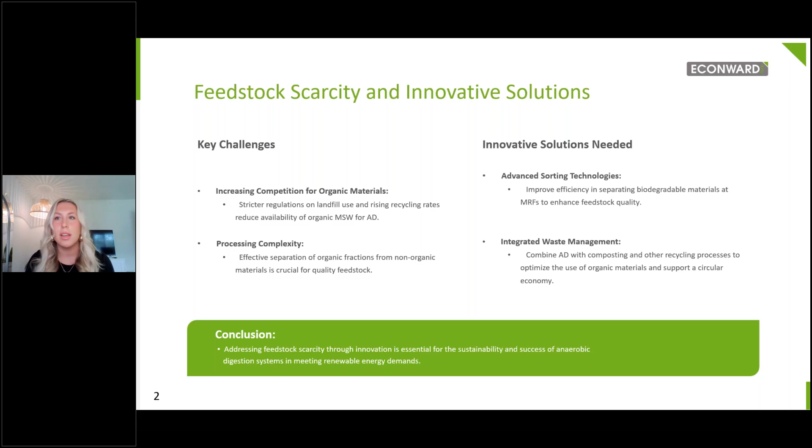Good afternoon, everyone. Today we'd like to discuss a pressing issue in the field of renewable energy, specifically relating to the scarcity of feedstocks in anaerobic digestion. We're particularly focusing on municipal solid waste, or MSW for short, throughout this webinar. As we continue to seek sustainable solutions to our energy needs, understanding this challenge is crucial. And just as a little disclaimer, this presentation is not geared towards agricultural feedstocks, but rather to new feedstocks outside that agricultural sector.

Here we will discuss a few of the key challenges and innovative solutions needed. One of the primary challenges we face is the increasing competition for organic materials for anaerobic digestion, which is resulting in lower prices per ton. Our good feedstocks, such as pure pre-consumer food waste or source-separated organics with low levels of contamination, are becoming less and less available due to the increase in competition.

The tipping fees paid by the seller of clean organic feedstocks for anaerobic digestion will continue to decrease due to the increasing demand from biogas developers seeking long-term contracts. So these plummeting tipping fees make biogas projects harder and harder to cash flow.

Additionally, the complexity of processing MSW poses yet another hurdle. Effective separation of the organic fraction from the non-organic material is absolutely crucial for ensuring that the feedstock quality remains high. Without adequate sorting, the operational efficiency of the anaerobic digestion system can suffer, ultimately reducing biogas yield and undermining the potential benefits of anaerobic digestion.

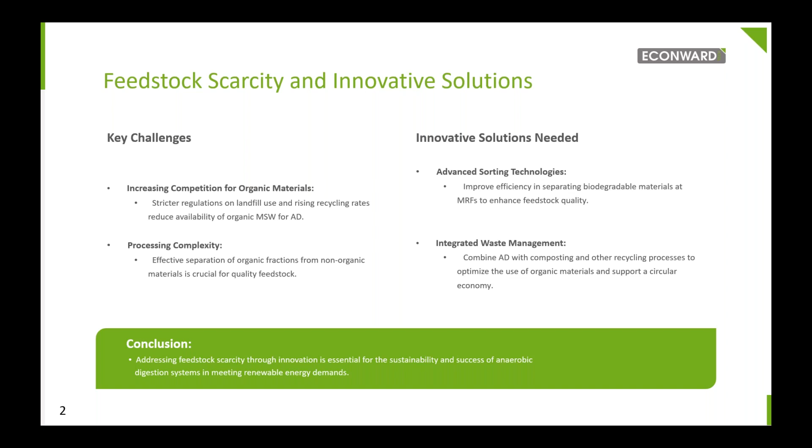Food waste is a smaller contributor at this time, but it's highly valued due to the high organic content, which will then generate more biogas per unit volume. However, these resources are really limited. They're super geographically dispersed, and they're often hard to collect or pre-treat, all of which contribute to a constrained feedstock supply chain.

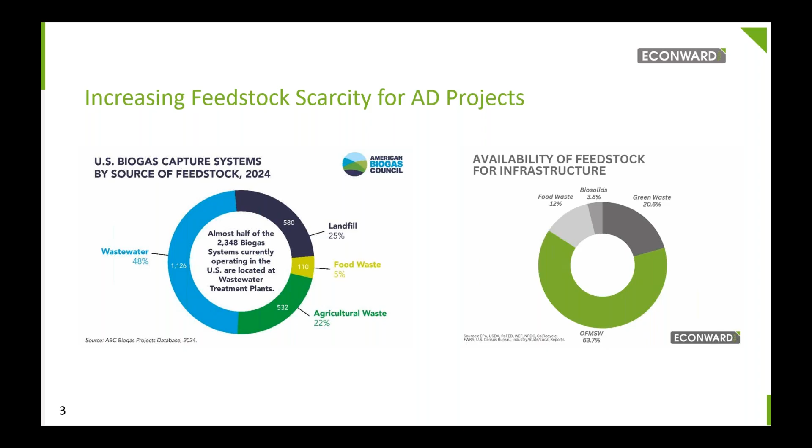The organic fraction of municipal solid waste, or OF-MSW, is considered one of the largest untapped feedstocks for anaerobic digestion. The US generates approximately 63 million tons of food waste annually, much of which ends up in landfills. Diverting it to anaerobic digestion plants could dramatically increase biogas production while reducing greenhouse gas emissions. A large share of this waste is not yet being captured, presenting a massive opportunity.

Globally, about 1.3 billion tons of food is wasted every year, with a significant amount being organic waste that's either disposed of in landfills or left unmanaged. If even a fraction of that waste could be used in anaerobic digestion plants, it would provide a sustainable, renewable source of energy. Europe has been leading efforts in integrating OF-MSW into energy generation, but the US and other regions have lagged.

Our cities and states are increasingly adopting zero waste initiatives and landfill diversion mandates, especially for organic materials. For instance, California's SB 1383 requires a 75% reduction in organic waste by 2025, creating a larger incentive to use OF-MSW in anaerobic digestion plants. Yet many jurisdictions have not fully implemented systems to divert this feedstock, leaving it underutilized.

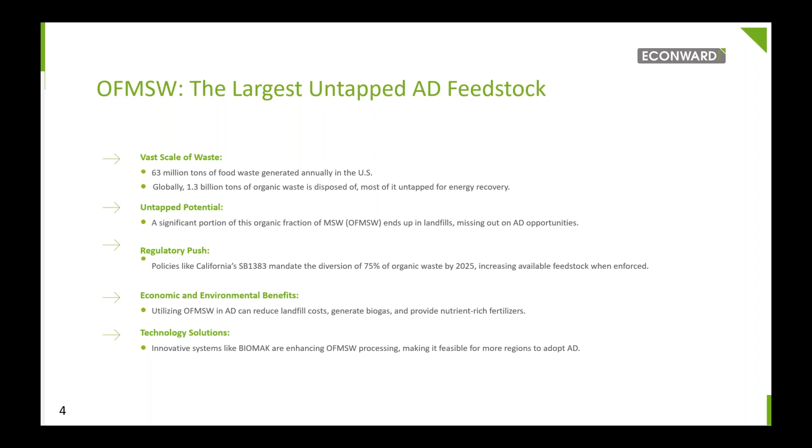These examples demonstrate that while OF-MSW is abundantly available, it remains underutilized in many regions, offering a significant opportunity for expansion of anaerobic digestion capacity globally.

As we face increasing scarcity of high quality, clean organic waste for anaerobic digestion, technologies like BIOMAK offer innovative ways to transform a broader range of waste materials into viable feedstocks, increasing biogas production potential and improving efficiency. The BIOMAK system uses a process known as thermal hydrolysis, which acts like a pressure cooker in our kitchen. It applies temperature and pressure using saturated steam to break down complex organic materials and waste.

This breakdown results in simpler, smaller molecules such as sugars, fatty acids, and amino acids, as shown in the hydrolysis section of this slide. By converting carbohydrates, fats, and proteins into simpler components, BIOMAK enables a higher biogas yield when the material is fed into the AD system.

One key benefit of BIOMAK is the separation of the hydrolysis stage from the AD process itself. By doing this, BIOMAK helps treat plants and condition the feedstock, making it more readily digestible for microbes in the anaerobic digestion system. This not only increases biomethane potential, but also reduces residence time in the digester, meaning faster, more efficient biogas production. This pre-treatment step is particularly valuable for materials that are typically harder to digest, such as

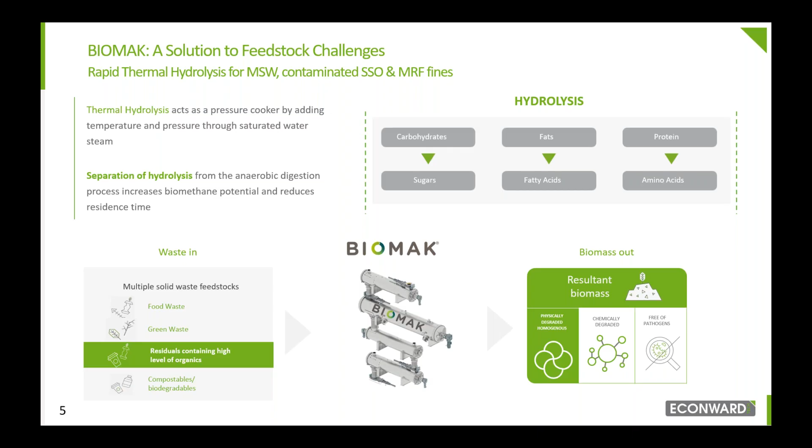Our system consists of 4 autoclaves connected in series by means of hydraulic valves. Inside, the waste is subjected to thermal hydrolysis. The top inlet hopper has a scale for precise weighing of incoming material before it's fed to the first autoclave.

Once the first autoclave or inlet chamber is loaded, the hydraulic valve is closed and saturated steam is injected until the desired pressure and temperature conditions are reached. That pressure can range from about 29 to 58 psi, and the temperature ranges from 248 to 320 degrees Fahrenheit. The main purpose of the valve is really just to balance the system pressure in the most efficient way.

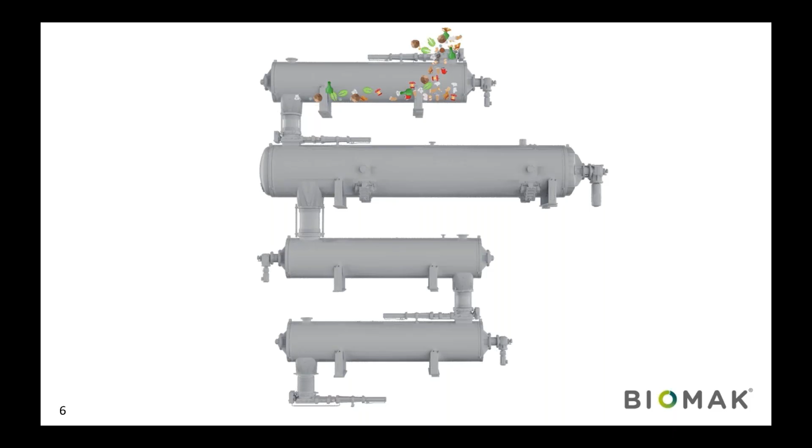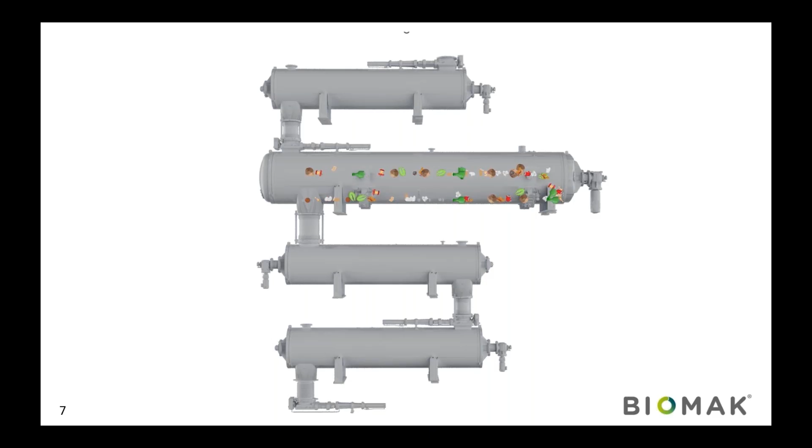After reaching the parameters set by the operator, the inlet valve to the second autoclave is opened, allowing the material access. The second and third autoclave, called the reactor and the transit chamber respectively, rotate the internal material. At this point, a new batch of waste would then enter the inlet chamber, but just for the sake of understanding visuals, this rendering just follows one particular batch of waste.

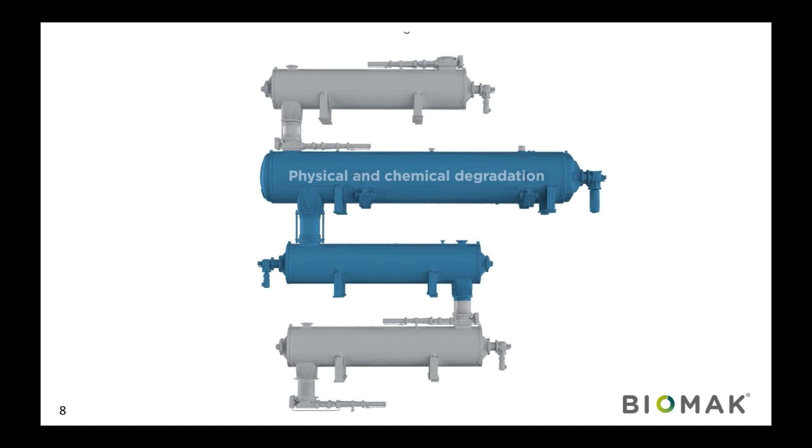Thanks to this movement and the stability of the preset temperature and pressure conditions, we can guarantee an effective and efficient thermal hydrolysis. This process ensures a homogeneous, degraded, and hygienized biomass. These 2 chambers, the reactor and transit chamber shown in blue here, operate continuously and are always conditioned at the same high temperature and pressure conditions, regardless of where the other autoclaves are in the process.

This rendering shows the hydrolyzed material entering the transit chamber, done to ensure full hydrolysis and undergo a longer residence time in these conditions while still being able to maximize the use of the autoclaves at this time.

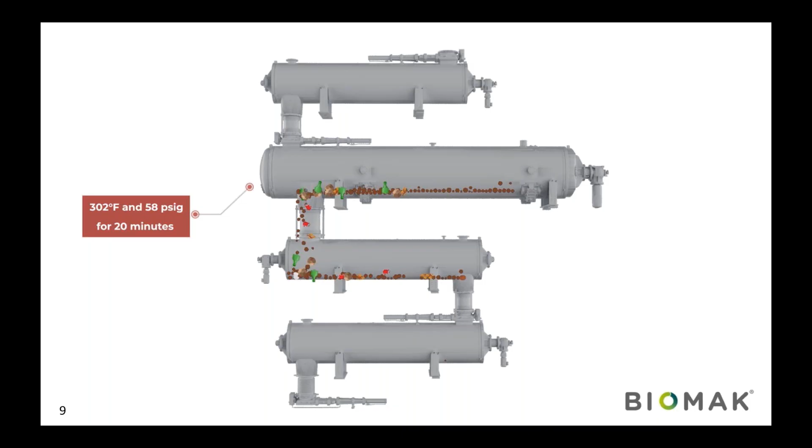Finally, in this 4th autoclave or outlet chamber, the depressurization takes place to unload the material at atmospheric pressure. The system is synchronized to reuse the steam from the depressurization for a new inlet chamber pressurization process. That system is bidirectional, allowing for the balance of pressure in both chambers. In that last chamber, the material is transformed into our biomass, which will be transported to a post-treatment process by way of conveyor belt system and through mechanical separation.

This mechanical separation is done through a vibrating screen where the hydrolyzed organics fall through a 25mm sieve screen, and those non-organics or the overs are carried into a separate collection bin. The time required to obtain the biomass is 40 minutes from the time the waste is placed into the receiving pit, but it undergoes hydrolysis in 20 of those minutes.

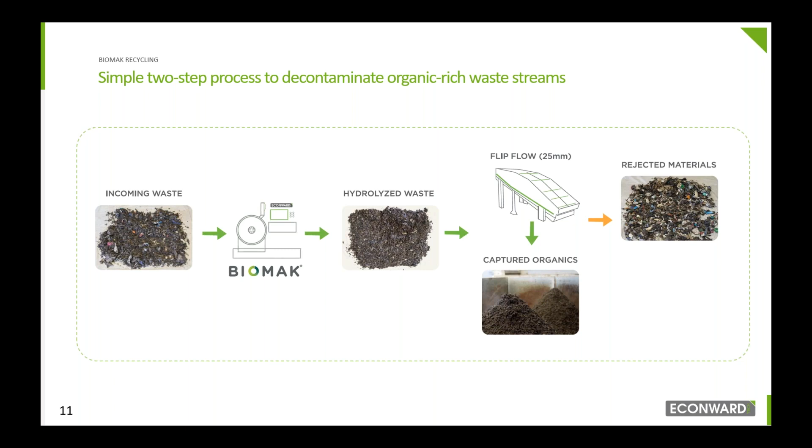Starting from square one, this is what the tipping floor looks like on an average day. Most of this composition is MSW, but you can see some areas where the load is more consistent with materials recycling facility rejects. All of that's totally fine since the material entering the inlet hopper has just the sole criteria of being under 10 inches. Any form of mixed residential waste is completely accepted and is commingled.

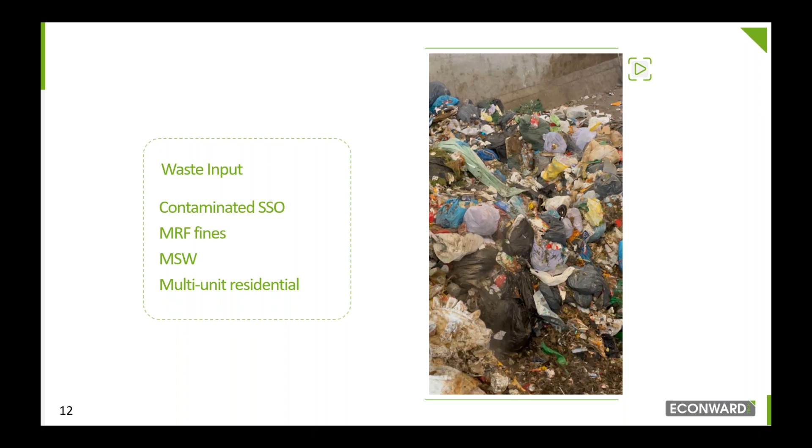This slide shows the first step of the process flow diagram from a different view of the input waste getting dropped in the hopper, where it undergoes a magnetic separator before entering the Biomak at about 8.8 tons per hour.

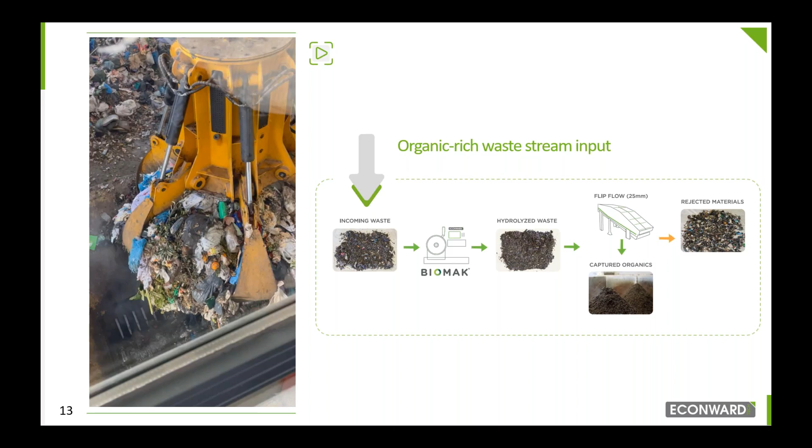This one just shows a sample of that same waste, just to get a preliminary visual of what that waste will transform into. With that in mind, please pay attention to those purple plastic bags, because you'll see them on the back end as well.

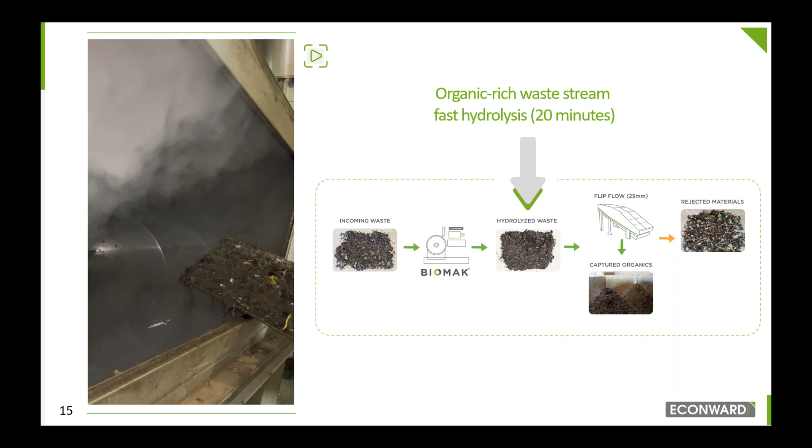So this is just a sample of that hydrolyzed biomass before separation. If you look close, you can kind of see those purple trash bags are all hardened and shriveled up.

Since the system reaches a high enough temperature to shrink and harden the plastic, but not hard enough to really melt it, you'll see those out on the outskirts or up in the middle where it looks like just shriveled up plastics. Next slide.

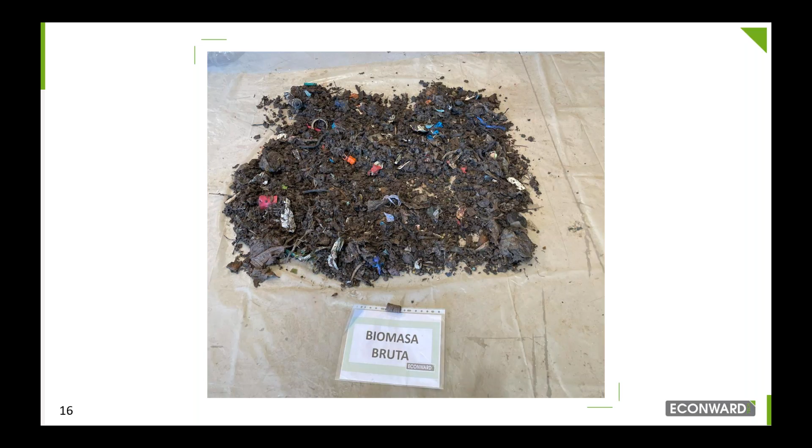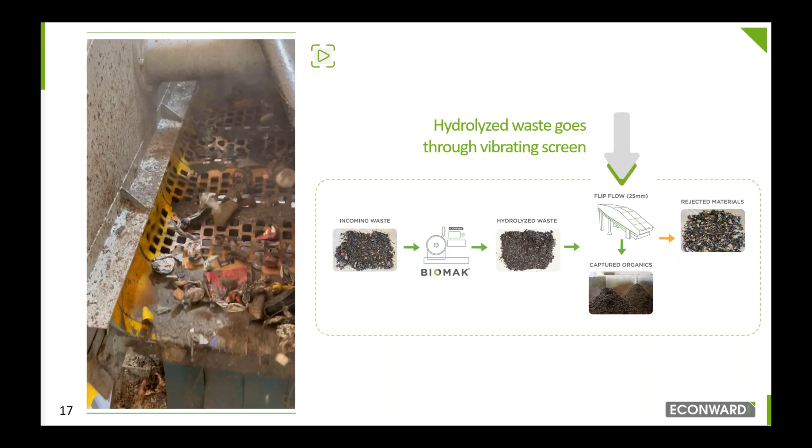But all those clean inorganics bounce over the screen and into a bin of mixed clean inorganics that can be further processed with other sorting mechanisms. And the organic fraction, now physically and chemically degraded, falls under those sieves into a bin of hydrolyzed biomass. Next slide.

This rendering just shows those clean organics with minimal contamination. From here, you can further polish and get rid of those very few heavy and light residuals, like broken glass or microplastics that might fall through those sieves. Next slide.

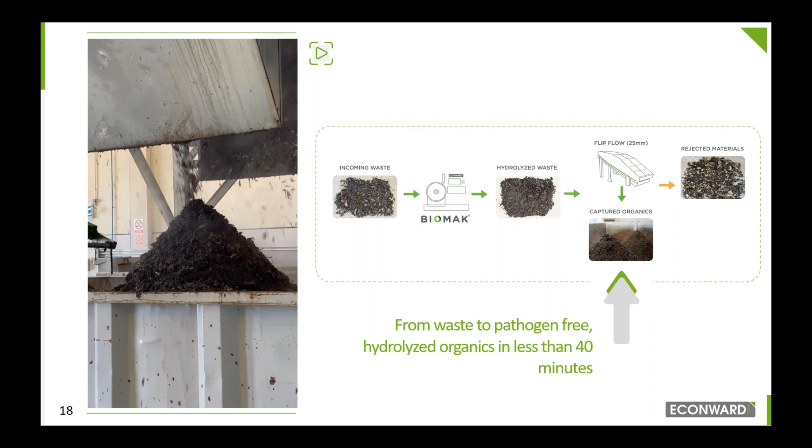But this is just what that fraction looks like. It's almost mulch-like, you can pick it up with your hands. It's a relatively dry fraction, gaining about 3 to 5% moisture content from the original state pre-hydrolysis.

And that's because steam is being injected and recirculated through the system, not liquid water itself. It's just steam being injected. Next slide.

Similarly here, we have that non-organic fraction we discussed earlier, now pathogen-free and clean of all those organics. After further separation, the plastics and other valuable material can be turned into refuse-derived fuels, or it can just be recycled.

In the absolute worst case scenario, only a small portion of this waste is now landfilled, as opposed to that entire load we saw on the tipping floor being landfilled. Next slide.

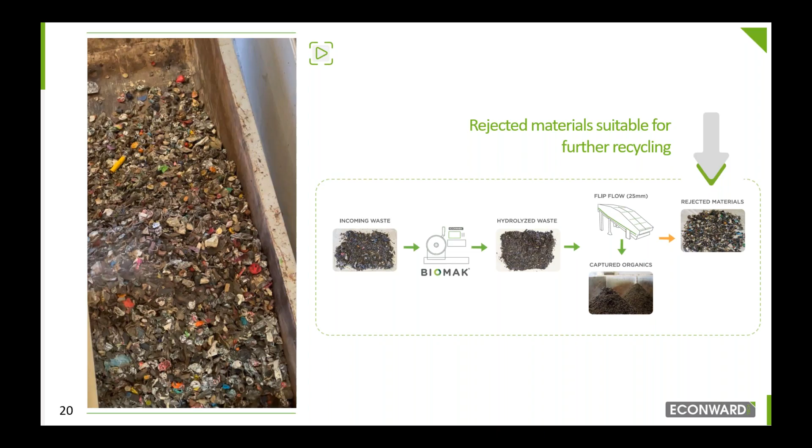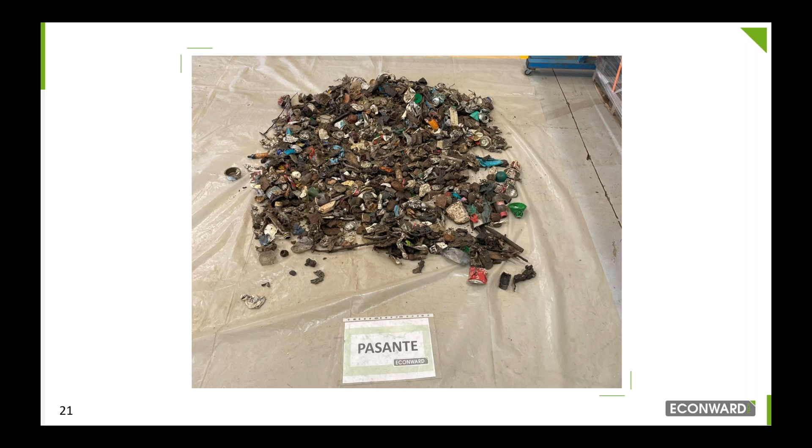Just like before, here's a sample of that fraction where you can clearly identify those Coca-Cola cans from the water bottles, from the sticks, and all those other inert materials. They're easily identifiable. Next slide.

Okay, now let's dive deep into the separation capabilities of the Biomak system's high efficiency organic capture process. Starting with the incoming mixed waste you see here, which is about 58.9% organic, Biomak applies thermal hydrolysis to separate the organic materials from the non-organic contaminants.

After hydrolysis, the material is processed on the flip flow screen, which removes larger inorganic items known here as rejected materials, with a rejection rate of about 90.5% non-organic. The remaining material, undersized to below 40 millimeters, is 83.2% organic.

As a result, Biomak just captured 96% of available organics, producing a cleaner, concentrated biomass ideal for anaerobic digestion. This process maximizes organic recovery, enhancing both efficiency and yield for biogas production. Next slide.

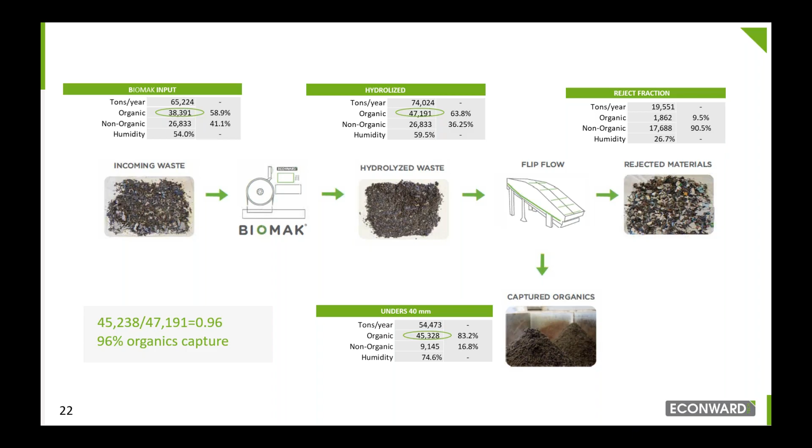This slide highlights the Biomak system specification and operating parameters. Biomak is designed for high capacity, handling up to 8.8 short tons per hour, or about 70,000 tons annually, all within a compact 3,000 square foot footprint.

It processes high solid organic fractions of municipal solid waste, with total solids ranging from 20 to 70%, making it versatile for a variety of waste inputs.

On the right, we see the system's core: 4 autoclaves operating at 150 degrees Celsius with 4 bar pressure. This high temperature and pressure setup ensures rapid thermal hydrolysis, with a total residence time of just 20 minutes, as opposed to the 7 to 10 days of biological hydrolysis that happens in anaerobic digestion systems.

Biomak's robust, compact design makes it reliable and ideal for facilities looking to maximize space and throughput in organic waste treatments. Next slide.

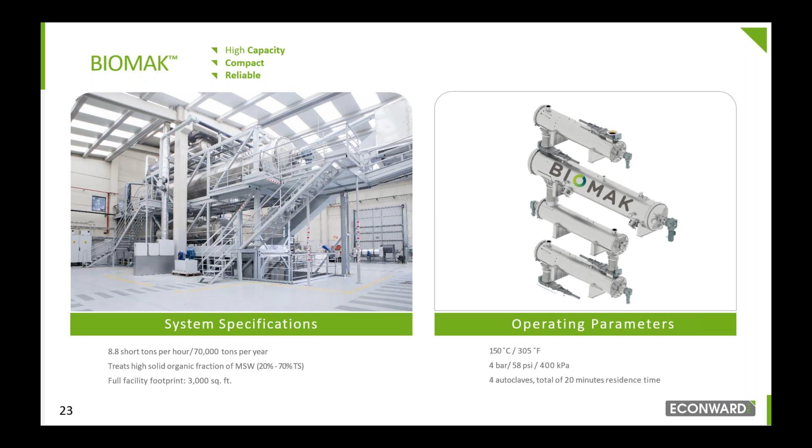As we come to the conclusion of our presentation, let's go ahead and recap the significant economic and environmental benefits of Biomak. This innovative approach not only transforms how we manage municipal solid waste, but it also presents a substantial advantage for both jurisdictions and developers.

For jurisdictions, Biomak offers crucial cost savings. By diverting organic waste from landfills, municipalities can significantly reduce their budget burdens, including lower landfill tipping fees and decreased transportation costs, all while processing waste locally. This shift assists jurisdictions in meeting regulatory mandates and avoiding potential fines related to organic diversion laws.

Moreover, Biomak promotes reducing landfill dependency. With less organics heading to our landfills, there is a corresponding decrease in methane emissions, which are harmful to our environment. This reduction not only mitigates climate impact, but also extends the life of existing landfills and delays the need for costly expansions.

Now let's turn to the benefits for our developers. The most notable advantage is revenue generation. Developers can monetize previously untapped organic waste streams, such as the organic fraction of municipal solid waste, to produce biogas. This not only provides a new revenue source, but also supports the growing demand for renewable energy.

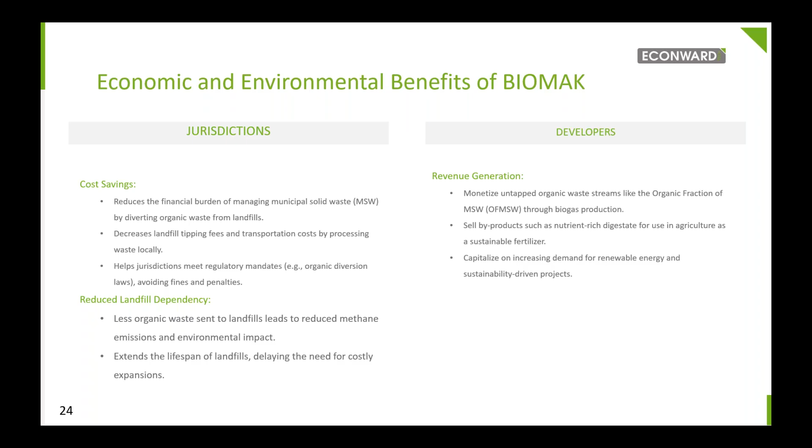As we wrap up our presentation, let's take a moment to reflect on the critical role that Biomak plays in addressing feedstock scarcity issues and promoting sustainability within anaerobic digestion processes. This innovative solution is not just about waste management, it's about transforming how we think about organic materials and energy production. Biomak serves as a key solution for the growing challenges we face in managing municipal solid waste.

By efficiently processing organic waste, Biomak helps reduce landfill dependency while generating renewable energy. This process aligns with our global sustainability goals and contributes to mitigating climate change by reducing greenhouse gas emissions, particularly methane, which is released from landfills.

In essence, Biomak stands at the intersection of waste management and renewable energy. It provides a pathway to repurpose organic waste, turning a potential environmental liability into a valuable resource. That dual benefit is essential for creating a more sustainable future.

But let's talk about how you can get involved. Our call to action emphasizes the importance of leveraging Biomak in your anaerobic digestion and waste processing projects. By optimizing the use of Biomak, you can maximize feedstock utilization, reduce operational costs, and significantly contribute to sustainable waste management practices. Let's first dive into optimizing your projects.

You can use Biomak to enhance your current waste processing operations. This can involve integrating advanced technologies for sorting and processing organic waste, thereby improving efficiency and increasing your biogas yields. We're also going to maximize feedstock utilization.